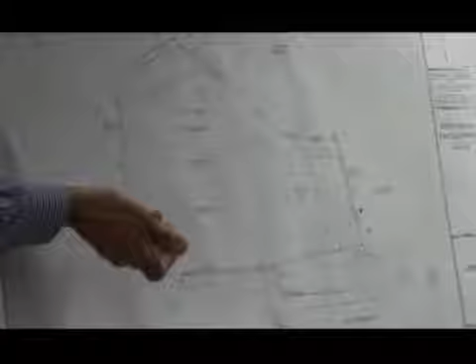For electric, we have a pole right at the corner, so depending on the utility company, it seems like we could probably pull power from that same pole, so we wouldn't need a new pole. So utility-wise that works, and then there's a sewer line that goes through right on River Drive, so we could access that for our sewer.

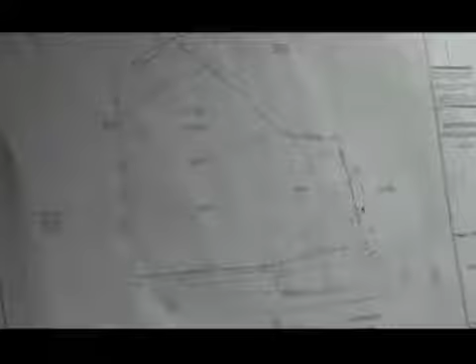So that's the information the surveyor has given us at this point, and this is what we think is going to be close to what we're doing for demolition. One of the other things I'm showing here is an erosion control barrier, to prevent any erosion from going into the water, the lake, or the wetlands.

So now we're going to go to our conceptual site plan. What you're seeing now is the placement of the building. We went back and forth, and part of what we're talking about with zoning analysis is that my first step is to grab that survey and start looking at your setbacks and all the zoning requirements you have. Questions came up because the setbacks on the original survey we were given were shorter.

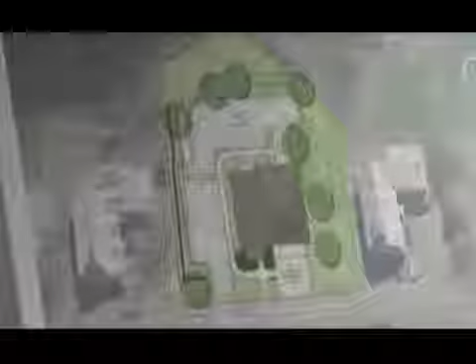It was 33 feet instead of the requirement for the zoning. We got some answers during the week saying that there was a variance that the town went to ZBA to get. So at that point we set a line for setback, that 33-foot line, and then we basically built our site from there.

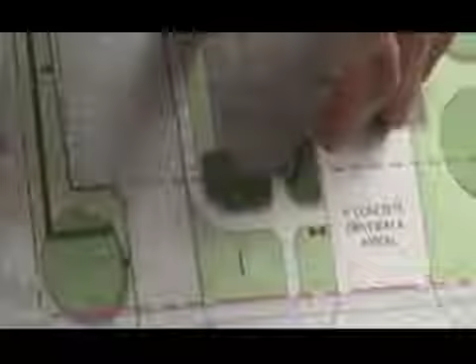Some of the other requirements we have in town are parking requirements, which state you have to double the amount of gross floor area for your building. So if we have around 5,000 square feet of building, we need around 10,000 square feet of parking, which is a lot. One thing the town allows is to not build all the parking at once—we can build what we need now and reserve areas for future parking. So what you're seeing right now includes up to 14 spaces, of which 2 are ADA spaces.

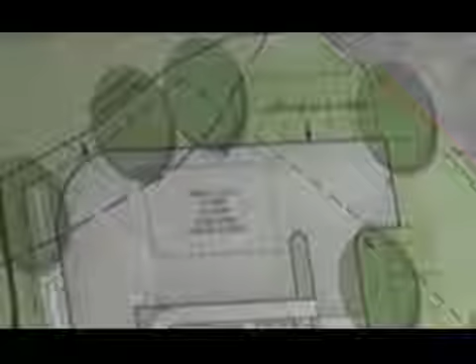But then you're seeing these areas labeled as overflow parking or gravel parking, and that's for the future. I want to make sure we understand now that if we wanted more parking than what we're showing here, this is the time to tell us, because I would need to grade those areas and make sure they work initially.

What about stormwater, the stormwater design? We have several catch basins, and then what we call a separator—basically a glorified catch basin that separates all the dust and solids in the water. We're proposing an underground chamber, basically a big hole full of gravel and pipe, where you can store the water for the required amount of time, so you're not sending a huge amount of water into the lake or other resources.

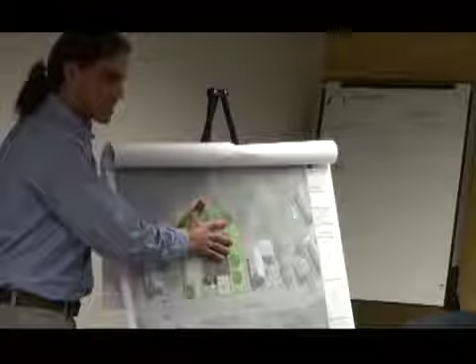The law requires us to have the same amount of water going out of our site after we build as there was before. What that means is that if it rains really hard, you're going to get a huge amount of water all at once. We've got to hold that water and then trickle it out little by little.

Those soil tests we did last week pointed out that the soil is really sandy. So this tank we're going to have has no bottom, and what ends up happening is a lot of that water is designed to infiltrate. Because the soils are good for that—very sandy, with a low water table—we can have a lot of that water just get infiltrated, which is what everybody wants, Conservation Commission and us as designers.

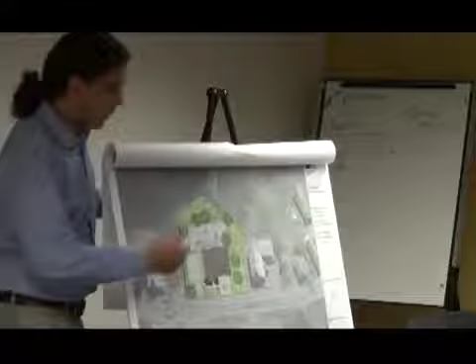We don't foresee a huge amount of water coming out of the system, but we always need an overflow, to prevent issues if we get too much water. That's why having a drain line that already goes here, which we could tie into outside of the 35-foot no-build area we can't really touch, is a positive for us. We still need to figure out if that pipe can handle the amount of water we're going to have, and that's the type of calcs we're going to keep working on.

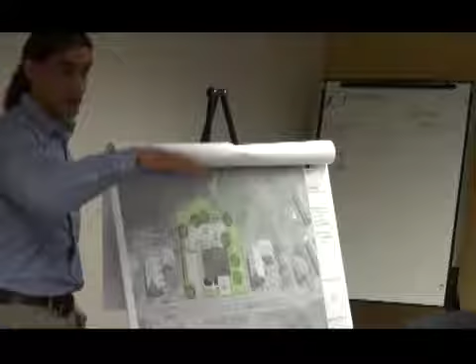Right now we're showing an area approximate to what that chamber would be, and it would be about 4 feet deep. So it's a big chamber of gravel that's going to be there, covered by about a foot of material, and then you have your 3.5 inches of pavement on top.

So that's going to withstand the weight of a fire truck moving over it? Yes, this is designed to withstand that. It has all the AASHTO requirements so that it can withstand the weights. So that's parking and drainage in short.

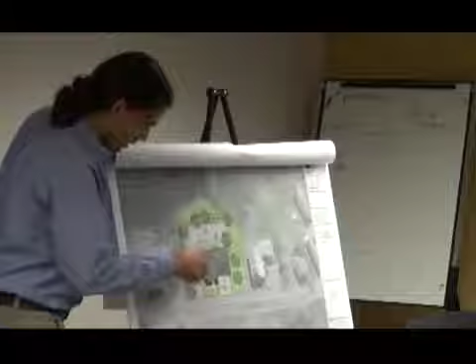We are showing about 6 parking spaces right on the back, right off of the fireman's entrance, on the back. This is our public entrance right in the front.

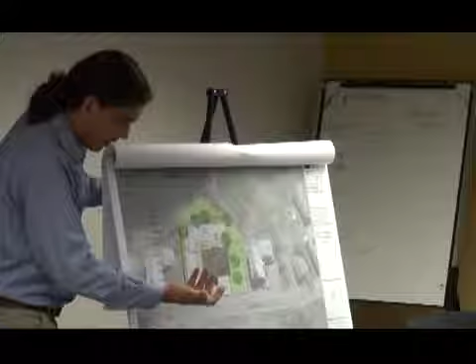The reason why we have this parking here is because there was talk about sharing some of this parking, and that's why it's located in that location. Also, it works with where the public entrance is, and we need to have ADA parking spaces for that public entrance.

Preliminary grading, we can have 2 parking spaces, and the grades would be good for an ADA route. So there would be no curb, there will be a curb ramp, right at that point.

We have some curbing, and the reason for curbing is because of that drainage. We have a very flat site, so we need to control that water so it goes into the right catch basins, and that's why we end up having curbing all around this area.

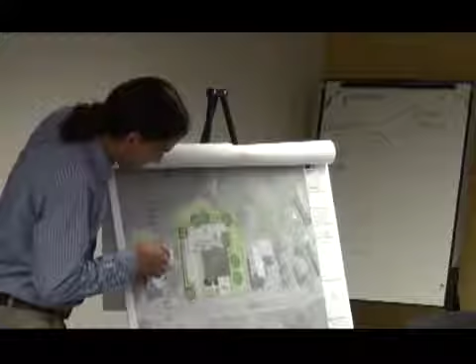We have a concrete driveway and apron that we're going to have for your fire trucks.

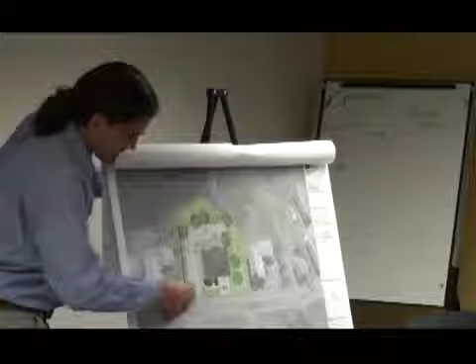There is pedestrian access, so if you park here, you can get off your truck. You don't have to go in through, if you needed to, you can just access the front entrance. And then you have one public entrance that goes to the existing walkway that's along the road.

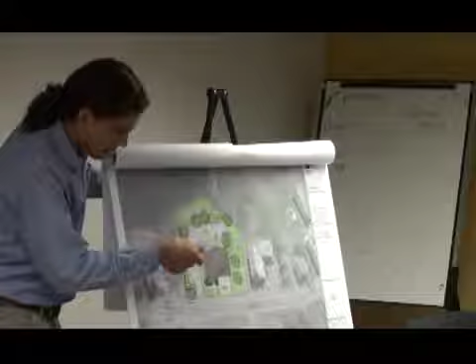As you keep moving along, there's a curb ramp for ADA, for people with wheelchairs to go up. Then we have three other entrances, one on the side and two on the back. One of those on the back is going to have an ADA accessible ramp, so by code we need to provide two ways of egress that are ADA accessible. Because this building is at a higher elevation, you need a ramp to get up.

How high is that building going to be, the elevation of that ground level? Well, normally the elevation of the floor of a building is going to be higher than your outside grade. The idea is that you don't get water coming in and other issues with that. I'm estimating right now a foot. We need to coordinate that with the architect, but if you have a basement it gets much bigger. When you don't have a basement, I normally assume a foot difference at this point.

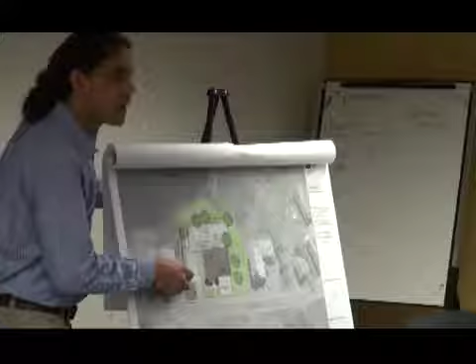You got ADA parking in the front there, and you got the ramp in the back. Well, we have an entrance that's ADA accessible, a very short distance from the ADA parking. Yeah, you didn't mention that. You said, no, you did say you need two. You need two, yeah, you have to have two. He's got two, the front and the back. You need a main entrance that's handicap accessible, but you need two ways out if you're a handicapped person.

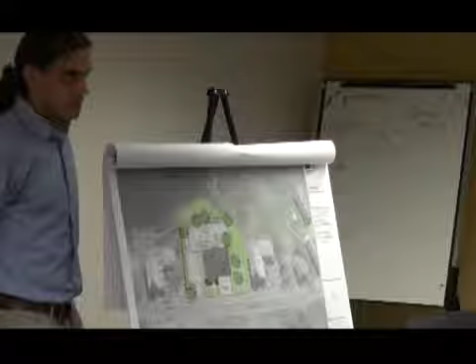So the back door, on the way out, is accessible just for exiting.

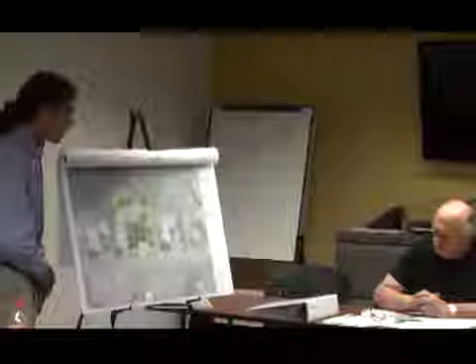I have a question on the drainage. Now, you're making that, let's call it a leaching tank for now. If you decide to add on to the parking and pave it, is that capable for that right now? Or would you have to do something different if you decided to add on to the parking?

When we keep designing, right now we have a very approximate size, so we have a ballpark that we can size immediately without having to go through the whole big engineering numbers process. Right now what I'm showing is conservatively big, it's bigger than probably what this requires because I wanted to have a buffer if we size.

If we decided to pave some more on the side there, will it take it, or do we have to find a different way when we do that? Well, when we design, first we're going to have this conversation back and forth on really how much parking you really need. Once we figure that out, I can talk to the designer and we can make sure we're designing to handle more parking spaces if we need to.

I could see the use of more parking if you were gonna have a drill or something, instead of getting closer to the road, you could use that back area to drill on. Then the gray area, is that all paved that I see there? Yeah. Okay, that'd be good. Is that parking you got 2-to-1 for that building?

Right now there's the gray area that's paved parking, and that's going to get built. I've shown some reserved areas that could, in the future, be parking. They would have to be allowable with the planning board. Right now I'm grading this whole area, but not grading this parking here, because if we don't really need it, we just have it for the future.

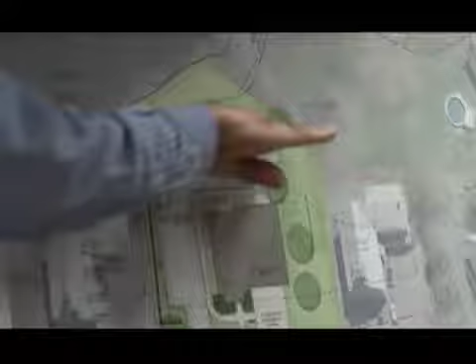Would that be filled to level, or is that going to drop off in the back there? It's going to drop off at that 35-foot line we were talking about, because the grade changes quite significantly. Is the grade going up to that 35-foot line? No. The existing conditions right now, the whole site is about 2 feet lower than the road.

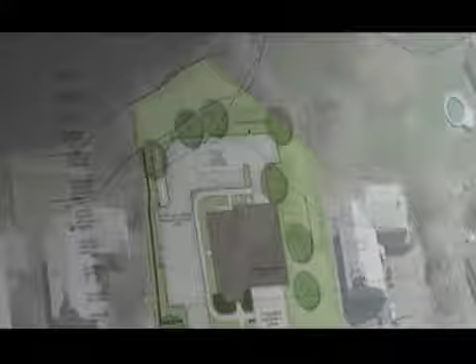What's the finish grade? 147.2, I believe - I have a very preliminary grading plan here, for the building floor plan. And what's the elevation of the road? Let me give you this. So the elevation on the road is 147, and the elevation for my building is going to be 147.2, so that we have positive drainage coming out. So it's going to be like level right across?

Visually it's going to be leveled, but there's going to be a 2% grade going out to the road, because you don't want water coming into your building. So that means that by the time you get to the entrance of that building, you're 2 feet higher, and it's 2 feet lower in the existing conditions right now. So there's going to be some fill, there's going to be grading.

By the time you get here, if you look at these parking spaces, if we really wanted to grade these to have these parking spaces, we would need probably a small retaining wall on the back of here, about a foot. I'm right now showing a curb on the back, so that gives you 6 inches higher. We would bring that down, but you'd still probably need a retaining wall about a foot, just to get these ones on the back.

If we could ask right now, what would it take the committee to determine how many parking spaces you require built when you open the building? How would you determine that? I would tell you, in my opinion as the fire chief, you have more than enough, because we would have priority over the church for the parking.

The only thing I see on that - I have to give you that truck dimension - you may lose one of those parking spaces off the back just for access. If you wanted to, you mean the truck that would come from the back? So 13 or 14 spaces is adequate? Yeah, we're lucky if we have 2 or 3 trucks showing up at that North Station. Not to say that wouldn't change, but even if we went full-time and that was considered a true substation, you'd be looking at it being manned by 2, at max 4 people.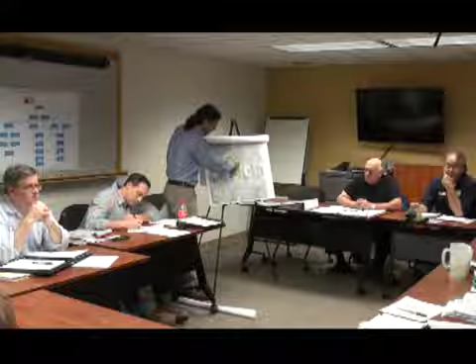If you're going to use that as a shelter, I would like to see maximum parking, because you don't know how many people are going to show up or where you're going to put them. This area here is going to be graded much less, you wouldn't need a retaining wall or anything like that. But it would definitely need to be graded the right way so you're not throwing water to your neighboring building, and all these other things.

So how many parking spaces are we showing now? 14. But if there's a disaster, you can park them anywhere, street, anywhere you can. What we're trying not to do is overbuild this, build too much capacity - more paving, more drainage, everything multiplies.

What's going to happen if, say, you get a fire call, chief, Sunday morning during mass, and all of those spaces are taken up by the church? They wouldn't be going past that public parking area. There would be handicapped spaces, and there would be something that says no access to the back.

Just like so you would have to reserve those spaces in the same back, same thing as probably here, like we have here, where you can't go past the restricted area. Plus the design constitutes backing the trucks in, right?

Yes, and with all your greenery in back, how do you get to the back doors now? It doesn't seem like you have much space left. On the back doors, to the right, there's a back door on the right of the building, right here, no way with your greenery in the back, right corner, over there by the garage.

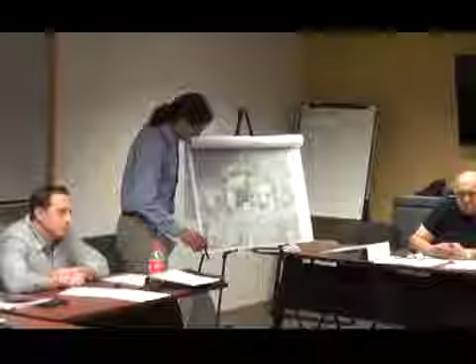You expect when the churchgoers use that parking lot that they're going to walk across the grass to the church? Right now they park along the road and walk on the road because there's no sidewalk there. So we'll provide an opening in the shrubs, put it in a logical spot. The only trouble is there's no walkway - you provide the opening but it's all rough terrain. They can put a walkway in if they want, but we're not putting their walkway in.

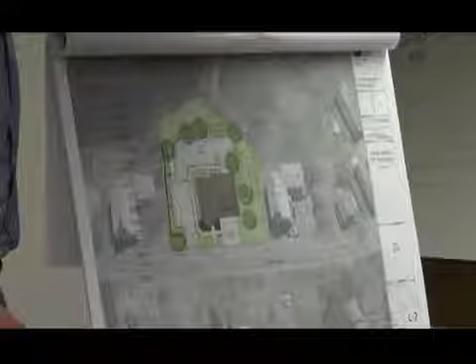Why put shrubs in the corner along there - you gotta maintain them. There's a fence there now, just leave the fence and skip the shrubs. Well, the fence is gonna be gone.

Because of your property line - look at that, grade it. This is the fence, and this angle, this is your property line. So I have all this space that I'm actually having to utilize. The fence isn't on the property - it's probably 10 feet over the line. If it doesn't show in that one, let me show you right here and you can compare. You see how the fence just goes like that on the angle, and I need some of that space for my parking spaces and for the gas tanks.

Arborvitae line everything else, and they'll grow quick. Yeah, be a nice fence of arborvitae - in the fall you get growth from them.

We've gone through parking, and then the rest of the site elements - a sign that you would have. This is a question that I had. Right now the regulation would ask for that sign to be 20 feet away from the front property line.

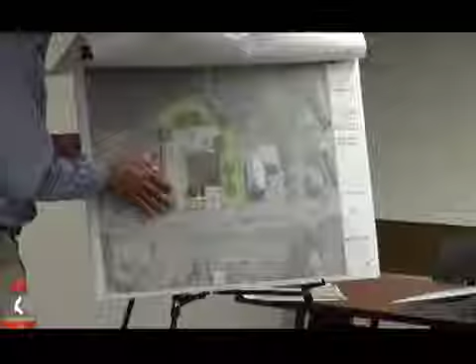That would put it basically on the entrance, and it wouldn't make a lot of sense. So I'm showing it actually much closer to that property line. When we go to planning, one of the things I'm suggesting is that we want the sign to be closer to the street. If not, it would have to be a variance - no, it wouldn't be a variance, the planning board has the right to do a waiver for that if we needed to. But I talked quickly with John about this - if it has to be 20 feet back, then the sign should be on the building instead, because it doesn't make sense to have a sign that's not going to be seen from the street.

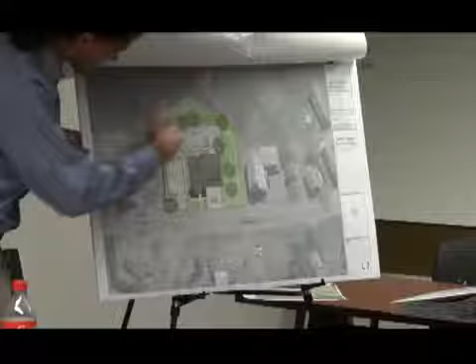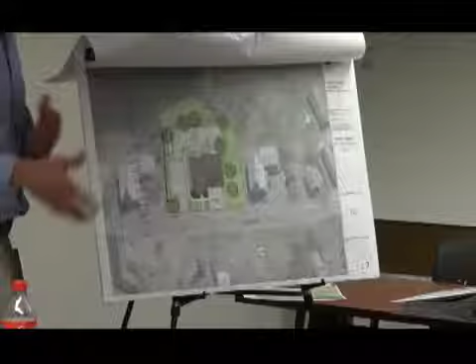Will those all be LED lights? All that lighting is gonna be strictly on that property, no overcast, it'll be a little scattered. We'll go through the process of doing a photometrics plan for it, so that'll tell us exactly how many we need - if we need less, we'll cut them down. That has to go through the planning board too, correct? Yes, lighting and everything.

Mike, do you do training at night out there, or would you do training at night in the back? I wouldn't say never, but we normally do our training here at Center Station - not to say we wouldn't do it there, but there may be times when we might. We're just trying to think what the purpose of the lighting would be - if it's for training or just safety, safe to get to your car. I think it would just be safety for folks getting in and out.

Couldn't you put motion detectors in, with lights that go on, powered by sun? You could do both actually - photo cell on, time clock off, and then movement. So those lights in the back, for instance, would only turn on when a car goes back there, but you can still keep the front 2 lights on so there's always lights on.

I think for site, I've gone through most of it. There's some shrubbery shown, some planting beds in the front just to create a nice entrance. But for the most part, I think that's it for the site plan and for the outside of the building.

From the front of that building to the property line, how many feet do you got there? I got exactly 33 feet. Is that what you need? Well, that's from the front of the building, but you have additional on there, about 4 or 5 more feet for the sidewalk. That's 37 feet to the property line, which is not the same as the curb, it's farther from the curb.

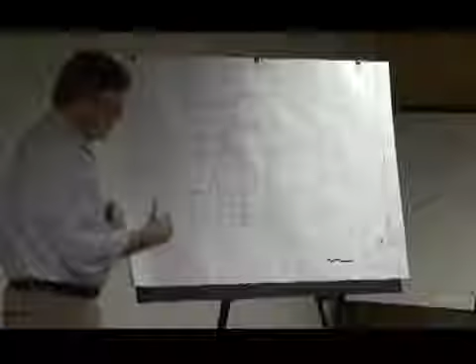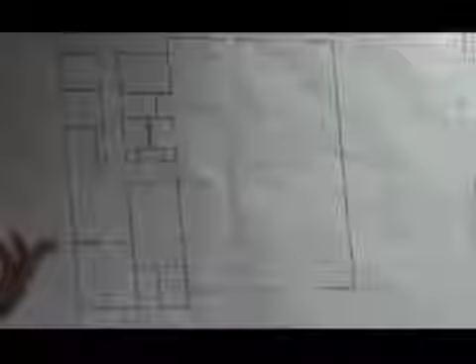So, we had the site plan, we had the floor plan that was developed before by the committee. We've taken a look at that and taken advantage of some of the design, moved it around a little bit, particularly because we're thinking about the issue of historical character, trying to get this building to look good in scale on that site. So one of the first things we did is we brought out the section of the office a little bit, so when you see the elevations that come up, it helps break apart that long length of building, makes it a little bit smaller.

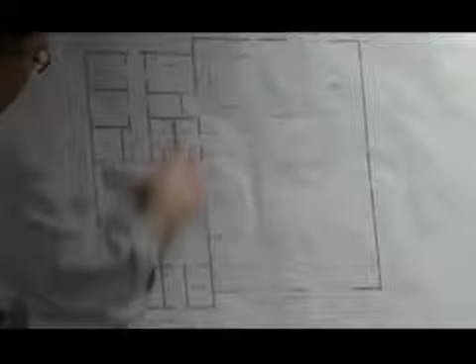As far as the space here goes, it's very similar to the design you developed before. Probably the only couple of changes were that the bunks were in the back here, and the mechanical room was on this side. The mechanical room didn't offer any chance for windows, and this is going to be seen from the public basically, so we moved the bunk room to this side.

It gives us windows. It also allowed us to move the office to an outside wall, because before the office was inside with no windows on it, so a little benefit is the office, same size, but now has a window, so it gets a little bit of fresh air.

The mechanical room is in the back. That works fine. All of our utilities, the generators, and everything we're talking about is in the back, so there's no sacrifice to putting the mechanical electrical room there. It also brought this corridor over a little bit, which shortened the corridor, a minor bump in efficiency by doing that.

For the restrooms, the other thing we did was, rather than develop an entire shower room, we're using the space of the two restrooms to put in a handicap accessible 36 by 36 inch shower stall. So while the shower isn't the most important thing going on here, it's not taking up any more room than it absolutely has to take up.

And certainly when you go in there and close the door, you have more than enough room to take a shower, get dressed, get dried off, and get changed. So we were able to save some space here and develop more storage space for you.

This part here is identical to the design you had before. Because of some of these savings, I was able to make these spaces a little bit bigger. We did talk about the issue of having to walk through the dispatchers to exit, which is relieved by the fact that we added a door here.

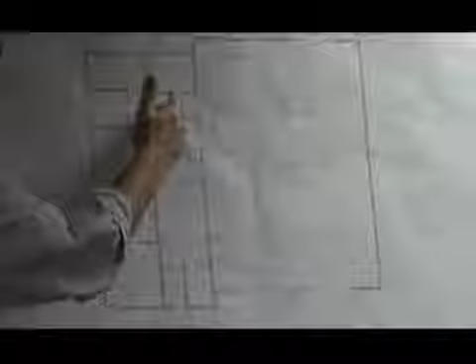We took out the little janitor's closet that we had in here, and we're basically going to put a slop sink out here, save some space, and certainly that's not much more of a distance. This area has a floor drain, so if a janitor's working out here, anything that spills on the floor goes into a floor drain. If it were out here and he was working, it wouldn't find the floor drain.

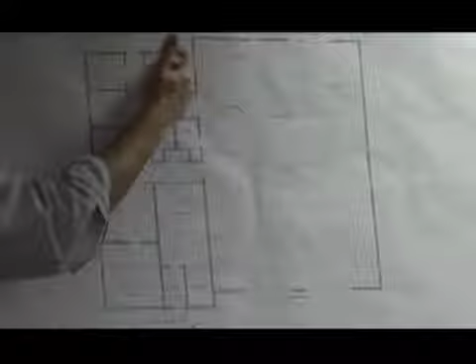I'll mention that in the mechanical electrical room, we do have a floor drain in there. We're looking at, if there's a boiler, if there's a fire protection system that needs a drain, a backflow preventer, you can do that. You put the electrical room in there, and they're going to start filling it up with all kinds of storage and shelves. And then you won't be able to - you've got to have 3 feet in front of the panel. Right, you're going to have your generator too.

Once you say that's a storage room or the generator room or whatever, they're gonna start filling it up with all kinds of papers, boxes, and everything you won't be able to get to. That's why we're getting these other storage spaces.

They wouldn't even think of doing something like that, would you? Not till after the inspection. Not till you leave. They don't include that in the authorities having jurisdiction, right? That's correct, I like that term.

Okay, it's not storage. Not storage, yeah, it's not storage. It's a mechanical room. No, he's got a storage room, and then a mechanical room next to it. This is storage right here, that's nice. That other room is the bigger room - mechanical.

Mechanical, electrical only. And your computers - no, that's down in the IT room, down on the front. The IT would be up here. Your IT computer servers would be here, in the 911 communication.

What kind of heat is it gonna be - gas furnace, did you say? Pellet. It's something we would like to talk to you about, what type of heat. We do have an alternate for a radiant system. I think the radiant system was principally in the apparatus area.

Since we're going to be air conditioning this side, we were thinking an air system would be more reactive and less expensive for you because you can heat and cool through the air system. The only problem with that is you've got ductwork - yes, we do - and that takes up a hell of a lot of space.

Is it all in the ceiling, ain't it? Yeah, there's space above the ceiling for it, it's been designed. Oh yeah, then that's gonna take away from your mezzanine. No, it's still on the mezzanine. I can show you, I have a quick section.

If you put those small mini splits like they were talking about in there, those mini split air conditioners - yeah, but the way they've got it chopped up right now, you're gonna have to put one in almost every room. And the mini split doesn't provide the code required ventilation, it just recirculates air to the room. You still need ductwork to bring ventilation and outdoor air into the space, and you still need probably some ductwork to exhaust some of the stuff that goes on.

So there, you're gonna go hydro air. Yes, you could do hydro air, you could do gas-fired duct furnaces, you could do all sorts of things. Well, you're gonna be doing the radiant in the bay anyway, so you can use the same, provided we get the alternate, yes. Base bid would probably be unit heaters, and then we go to the alternate for the slab.

I thought we had to change that. Oh, I'm sorry, you did, yes, you did - put radiant that is in the base bid, yes. Okay, where's the kitchen facilities in this thing?

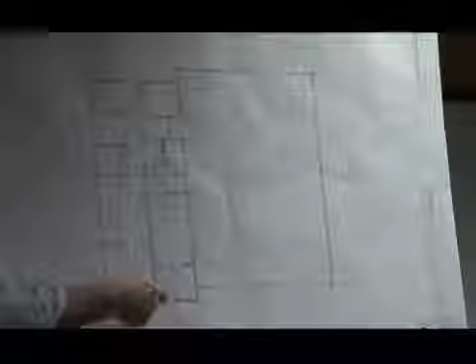Kitchen is right here, so you can't - it's light, but the kitchen is against this wall. We have a stove, a counter, a sink, and a refrigerator. There's planning to be a little bit of a day room here. This was a meeting training room - I'm sorry, I thought you were familiar with the previous design.

So right now, we're showing a table that can be put together with about 8. If you add another table and you go like rows, you might get 12 in there, maximum.

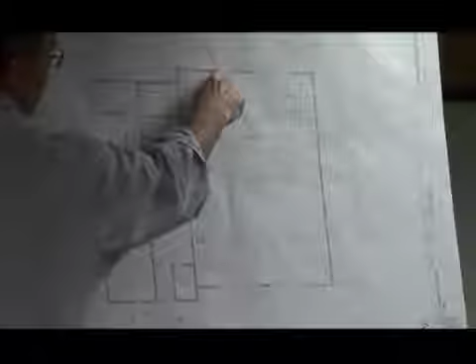It'll be tight. John, are you showing a doorway on the south entrance anywhere on the south side? On this side right here? Yeah. No, we have the one door here off the back, which was off that plan. I didn't see a door on the south side. We don't have a sidewalk going out that way either. I thought you wanted a...

Well, we had one listed, but I just thought it was wanted right up the corner of that building. We had talked about possibly having a small area for a grill or something like that, right off the building. We're thinking off by the apparatus as opposed to off here. It was just a discussion at the time.

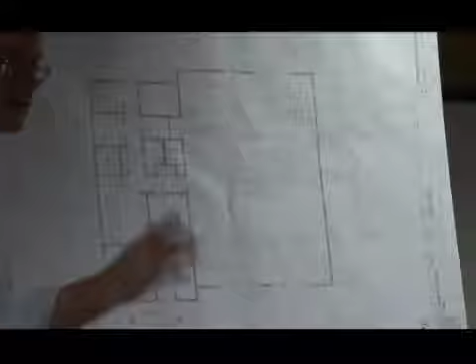If it doesn't work on that side, it doesn't work on that side. It certainly does. One of the things we can put is a door here. That's not something I'm absolutely positive about, but no problem.

Even for the future, if they wanted to put like a patio or something out there, at a later date you guys could do that, right? I would think you'd want to be behind the building rather than seen from the road on the side. There's a couple bushes back there that would cover that much. Put a nicer patio right in here. Yeah, I could make that work.

Well, you've designed it differently now where you have that little stuff back, so. Don't forget, every door and sidewalk needs cleaning, more so after drills or after you guys have a cookout, snowstorm with sand and salt, after a fire, after drills. Public buildings gotta stay open.

As far as the turnout gear racks, I've got about 7 here and I need 5 here. People can't get to them all, we run out of space, and I don't know because of that particular door location.

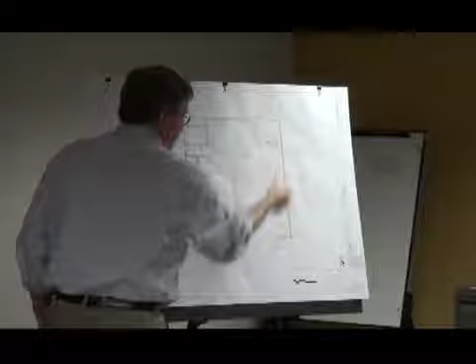So I'm not going to be able to get all the turnout gear racks here. Some of them will have to be there, unless you want to stretch them out somewhere else. That's something to think about.

Right now we have a stair going up to the mezzanine, right off the back here. Where does that start from, the front? It starts here, comes back and goes to the middle, and this is the top of it.

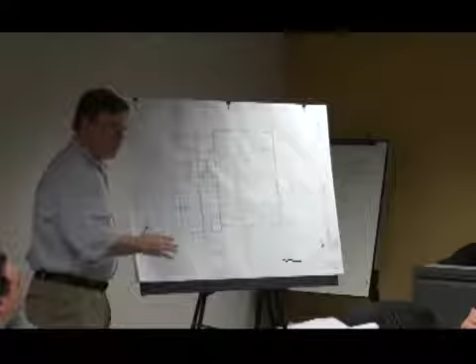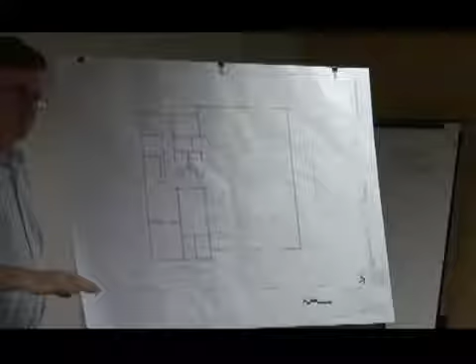I would like to be clear, there's no public use up on that mezzanine. So there would be no requirement in the Massachusetts Handicap Code to provide an elevator or do anything else like that. Outside of that, our firm is required to comply with all laws, codes and regulations, and one of them is the ADA that we're all familiar with.

We can tell you that the ADA will not allow you to put storage up here. If we call this a utility mezzanine and put some HVAC equipment up here, maybe the air handling unit comes up here, I can correctly describe it as a utility mezzanine or utility platform. It can be built without needing a handicap stair or elevator. If you were to use that for storage, you would not be in compliance with the ADA.

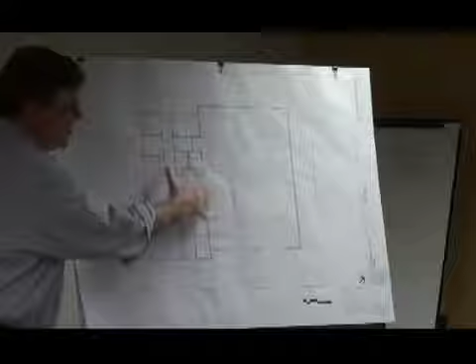I don't want to be the one who, 10 years from now, after storage is put up there, gets sued because I designed a building that wasn't ADA compliant. So my point of view is you need to agree, in front of me, for the record, that it is not going to be used for storage. Everybody agree? Agreed. Yeah, I think it's also a good place to put it. Everybody agrees, right?

Is that gonna be closed right up, or is that open? It could be open or closed depending on what you want, because there'll be less than 10 people up there, since there won't be any people up there at all. It'll be a utility mezzanine, so it can be closed or open. I would almost advise leaving it open, because then you don't have to air condition or treat it differently. It's part of the same atmosphere.

We had asked if you could incorporate that training wall in that space. Is that doable? Certainly, yeah, for that purpose that's not an issue.

The one question I had is in the dispatch area - are you required to have that door going out the front, the one going into the vestibule? Is that a requirement? If this is your main entrance... that's the main entrance. Oh, would you like the public to go into the meeting room instead?

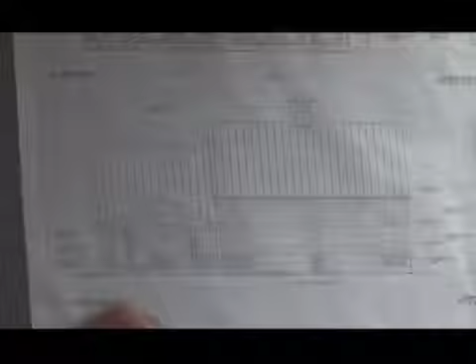We've got a couple of different types of siding to kind of break up the height of this building. Along the bottom we have a shake style siding, could be fiber cement, with a little bit of trim board. Clapboard siding is sort of the middle part. And at the very top we have a vertical board, kind of like barn board, reminiscent of the barns in Hadley.

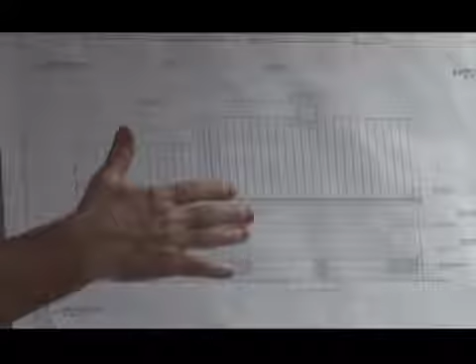So you've got a three-part, very classical elevation: a base, shaft, and cap. You repeat the eyebrow arch over a little front porch area so you can identify the entrance easily. We can still fit the mezzanine above this, and we don't have to have that very high ridge run the entire length of the building. Again, kind of break it down with smaller scale elements that are in the church and in the hall, so I'm hoping this appeals to the historical commission.

On the side, this is the side that basically faces the parking lot. That siding runs along the whole side here. We pick it up here to try to create a little bit of interest on the side, pick up the eyebrow idea, and have vertical barn board here. In the back where this thing steps, you can see it steps about 4 feet and repeats at a higher elevation. We have a cupola that's kind of a trademark. I tried to come up with a louvered design here that looked like the shoulder patch of the fire department. I haven't quite got it yet.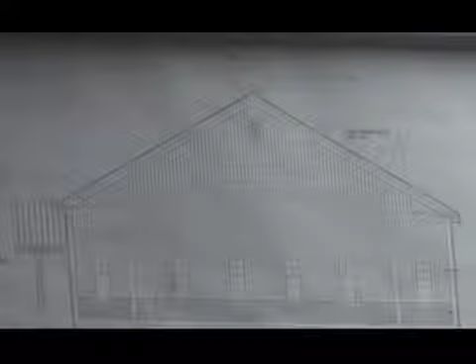On the side facing the hall, this is the largest elevation because it's one tall, empty side of the building. We put some windows in there to sort of take the curse off the flat wall, since there's not a lot going on there, but it makes it look more habitable. Again, we picked this up at a higher elevation than over here, running right along the eave line. And again we have the barn board up there to accentuate the three elements, constantly trying to break down the scale of this very large space into much smaller looking scales.

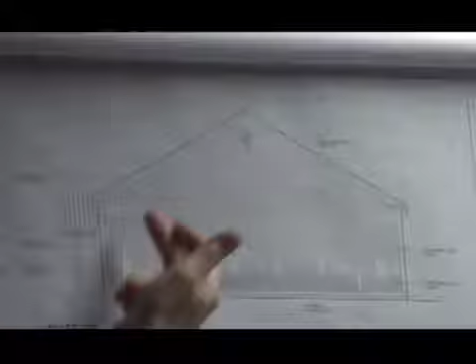There's a bit of, where this takes off with the spring line of the arch, there'll be a large flat column framing this window, and then you've got 4 windows in between there. Same thing on this side. A little bit of an element there that creates some interest and aesthetic.

The front porch overhangs a little bit. There's a bit of metal roof, so you can see it in either direction when you're coming up and down the road. My concept for the colors would be a gray siding, white trim, a dark maroon door, and I'd propose a dark maroon red roof.

What's the height in the mezzanine over there? Okay, so in the cross section here, which is taken through the office addition, this would be the meeting room, the day room, the office, and the 2 bunks. It's like looking at this. This would be the mezzanine above. This is about 1/3 of the area of the apparatus room.

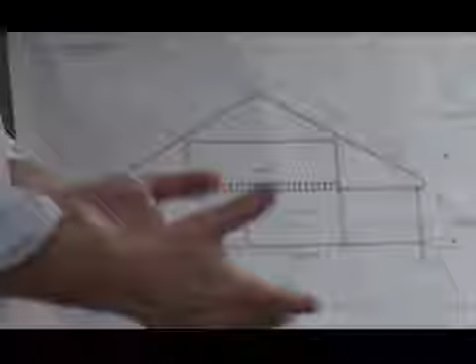There'd be joists, probably an I-joist, framing this area, because I know you're going to want a very heavily loaded utility room. And then you can see the way the trusses work: you have a truss here, a truss here, and a bridge truss over the top of this.

So you can do this with 3 prefabricated trusses, sized so they can all be shipped on the road. We've done this design in many different public safety facilities, trying to create a cavity out of the truss space, so the insulated envelope would come up like this.

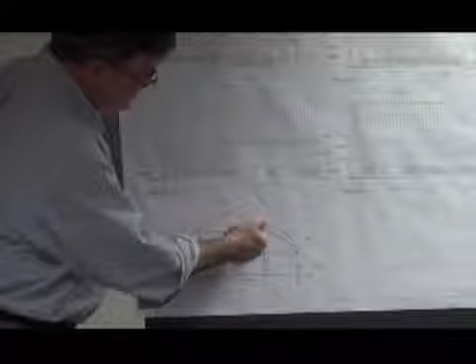You would lose all that from the eave all the way in, right? Those corners, you're losing, but it can't be more than a third of the area anyways. You wouldn't have the headroom anyways, and it's more money that could go somewhere else, like the other elements that you want to have.

What's the framing on this building? It's all wood frame, 2x6 generally everywhere, and sided, and obviously prefabricated trusses for the roofing.

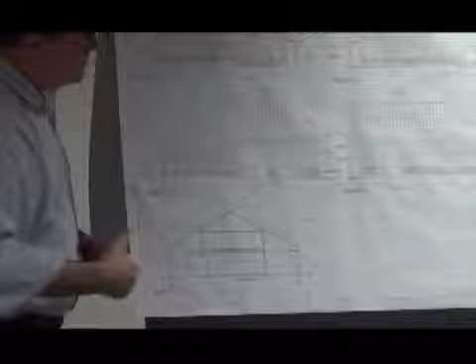Is this earthquake proof? Yes, it has to be, essential facilities. We've done them all the time, and maybe not proof, but designed for it.

Is the brick and block way too costly for this project? Yes, it would be. Particularly, masonry is getting very expensive.

Put a snow fence on them. Yes, you would put some snow guards on there to keep the snow from falling across.

On the south elevation, on the bay side, would the windows take away from storage space inside? Yes, that would be the case if you wanted to store right up against the wall there.

So we could maybe come up with 3 windows instead of 4, unless we give that space more wall. Could we elevate them a little higher? Yeah, they could. The idea behind the windows was to try to do the cottage style, where the bottom is larger and the top is smaller. We originally thought of putting those windows high because you could use that whole wall for tall windows.

It'd be nice to keep those 2 windows. We could show it, keep the 2 and maybe do the short ones up top instead. Yeah, maybe keep these 2 here and do short ones across the top, keep just the upper one, that's a good idea, and do 4 of them.

This does sacrifice some storage by bringing it down. I guess you could frame it out so it looked the same and do something different in there. Or you could just put a film on the glass and they wouldn't know, and it would still look like a residence.

Let's do cost effective here, let's get the prices and then tell us. Could you put a second panel of windows? Yes, you could, that would give you more light. Depends on where you want to keep your money. You've got one right here, do we want to do another one? I'm not saying that, John, I'm just trying to be cost effective. What could we do between the two? I mean, it doesn't have to be just one panel of light.

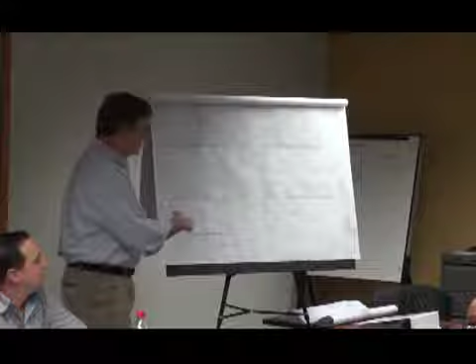There's actually 7 panels here. We could do another panel of light if we're trying to increase the daylight in the space. Obviously these do a great job of increasing the daylight in the space.

I didn't put any windows in the back here either, I don't know if you're interested. We don't need it, nobody's gonna see the back of the building. That's more for the front to keep clean.

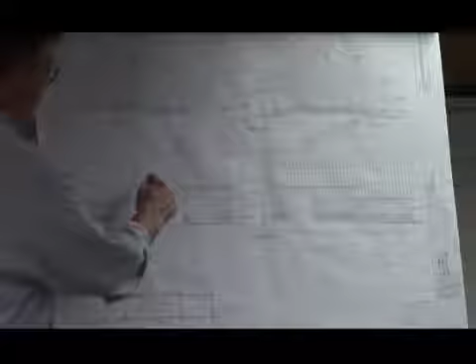Could you do some dormers or something to stop the snow from coming down above those doors? I don't think so much there, but even up in the ridge line somewhere. Up here I don't know that it would help you as much. No, down low. We've got some doghouse dormers with the arch to kind of mimic the front entrance.

You can take and put two, or even double windows like you have. I know they're not gonna look at anything, but you could do that kind of arched eyebrow above those, with a nice little roof coming out like you have at the front entrance, but at a smaller scale.

That'll cost too much, it's gonna be a lot more money. I just think, from the point of view of trying to flash the metals in the valleys, you have all these valleys up there. Yeah, it could be done, but eventually that would be the place where it leaks first.

It's no different than flashing a cupola. The cupola is nice because it's on top, and water's gonna run down those valleys - same thing as the front door. Is that cupola gonna be lighted? Have a light up there? Why does everybody want lighted cupolas? We want a lantern so we know if they're coming by land or by sea, by pond or by swamp.

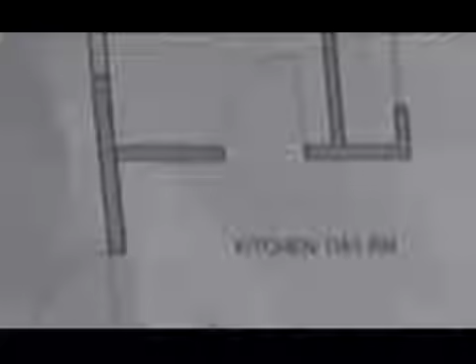We would like to be at planning probably about a month before the bid date, because we don't know if we're gonna get through the first meeting. You could always get pushed off, and we don't want approval still pending when we're going out to bid. Plus there's an appeal period, but that almost never gets used, though maybe in your town it does.

It helps to have people on the board. Alright, so you guys are gonna take care of that. Yeah. Small town. I think at the end of next week, meeting tomorrow, I swear.

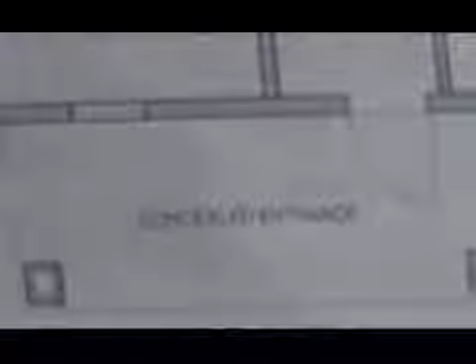Is there anything else that anybody wants to talk about pertinent to this project? Oh, I know you like to say a lot of things, that's all. So are you.

So historic in June, Concom in July, and planning in August. Is there any subject you want to talk about for the next meeting?

If you call town hall, either the clerk or the town administrator, they can tell you when they meet. It's not on the website? Well, it's sporadic, and I think they do post them with the clerk. Conservation is the same.